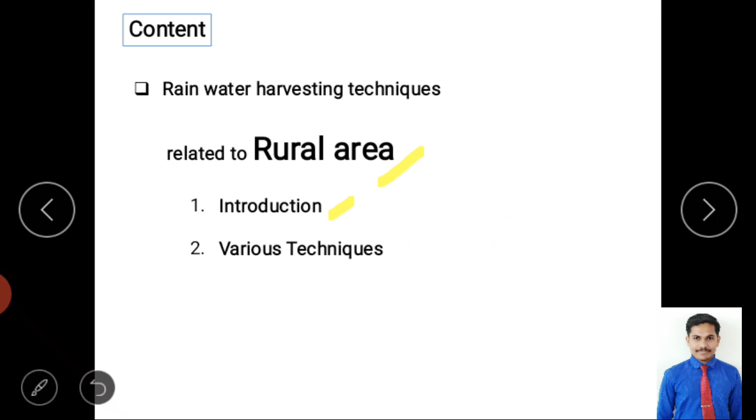First we'll understand what you mean by rainwater harvesting. As already explained in previous lectures, rainwater harvesting is mainly related to collection of rainwater, storage of rainwater, and reuse of rainwater runoff. This is our main motto.

But here we are making classification, because separate techniques are needed for urban area and separate techniques for rural area, due to certain limitations and advantages. If you see the limitations, some problems require simple and low cost techniques for rural area.

So what is the condition? Simple technique and low cost technique, that is one concern. When fulfilling the simple and low cost technique requirement, we can adapt it for rural area. Then there is a requirement of minimum specific expert knowledge, because of less skilled laborers and less known persons, it requires minimum specific expertise and knowledge.

Then it should offer many benefits, from a single work it has to benefit many works. For example, when making rainwater harvesting, it impacts drinking water, irrigation, and other conditions or environment. So it has to offer many benefits.

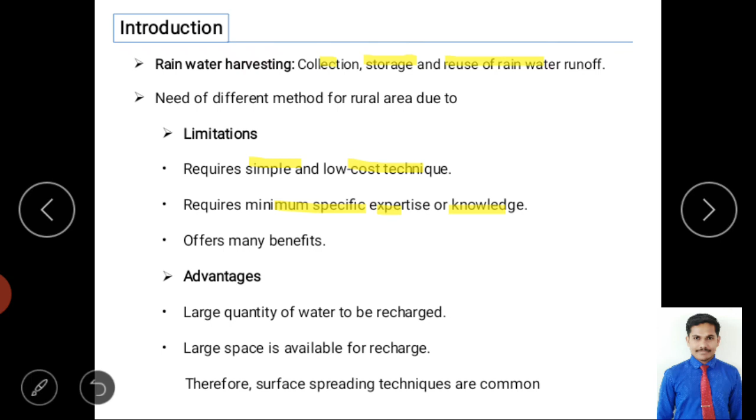Next is advantages. In rural area we get some advantages. One is large quantity of water for groundwater recharge, since huge quantity of rainfall is coming, and it is pollution less. Compared to urban area, rainwater from rural area is pollution less and less contaminated, so we can easily make groundwater recharge with good quantity.

Then large open space is available in rural area, and even the cost of the land is also less comparatively. So that's why we mainly go for surface spreading, and because of space availability, we focus mainly on surface spreading techniques.

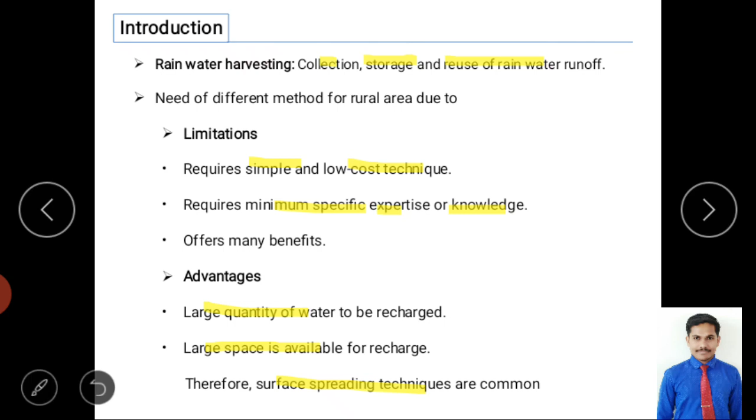There are some common techniques, known based on certain conditions. Here I have taken 11 techniques: first is the terrace method, then field trench method, cisterns method, micro catchment, rooftop harvesting, percolation tank, check dam, farm pond, groundwater dams, afforestation, then conjunctive use.

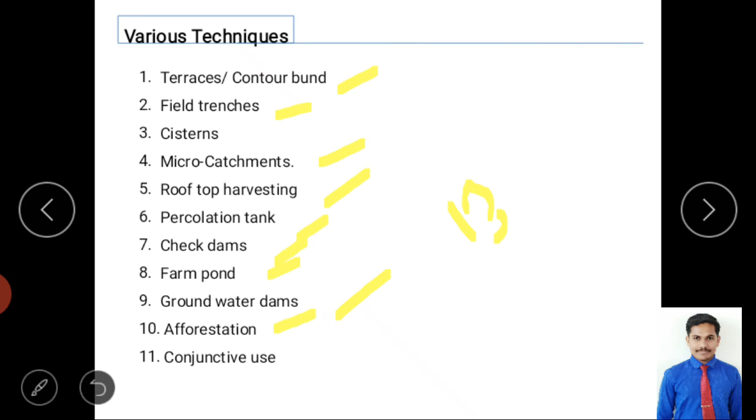Conjunctive use means it is balanced use between surface water and groundwater. So what do you mean by conjunctive use? It is balanced water use between groundwater and surface water, and from that we can overcome the shortage of water. Now we'll discuss these techniques one by one. This is the list, like you may get a question to list and explain the different techniques related to rural area. Now we'll explain one by one.

One is the terrace method, also called contour bund. I think we studied this in the generalized techniques of rainwater harvesting. Here also we use the same technique if the land is sloped land. On sloped land, quick runoff will occur, so to tackle the quick runoff we construct some bund and excavate along the contours.

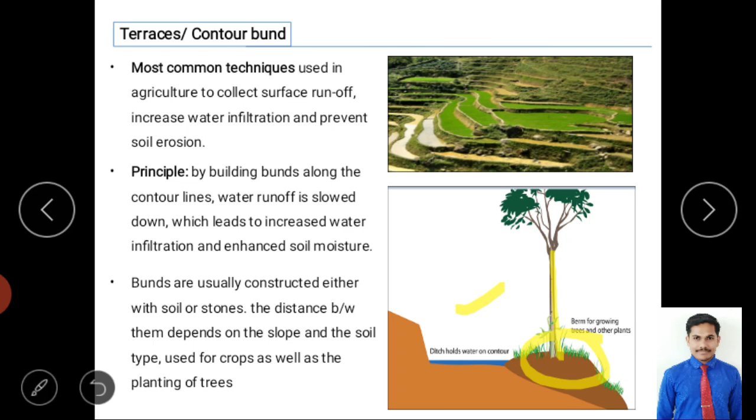So we'll see the next method now - field trenches. Basically trenches can be seen as extensive ploughing at the right angle to the field slope. For example, here we are excavating some material. If it is a land, for this land gradient, perpendicular to the surface we are excavating the material.

Due to the excavation of material, there is a ditch formation, a trench formation, and due to this trench formation along the wasteland or hilly areas, we can collect the water. Basically the trench can be seen as extensively ploughing at the right angle to the field slope, breaking the slope and therefore reducing the velocity. So here also we are mainly focusing on reducing the velocity of water runoff, reducing soil degradation and erosion, and enhancing the infiltration of surface runoff.

So what are the main focuses here? First we are reducing the velocity of the rainfall runoff. Due to reducing the velocity, it reduces silt deposition, soil degradation, and erosion. After that, it causes infiltration, and due to the infiltration we are getting soil moisture condition. So field trenches suit most soil and rainfall conditions.

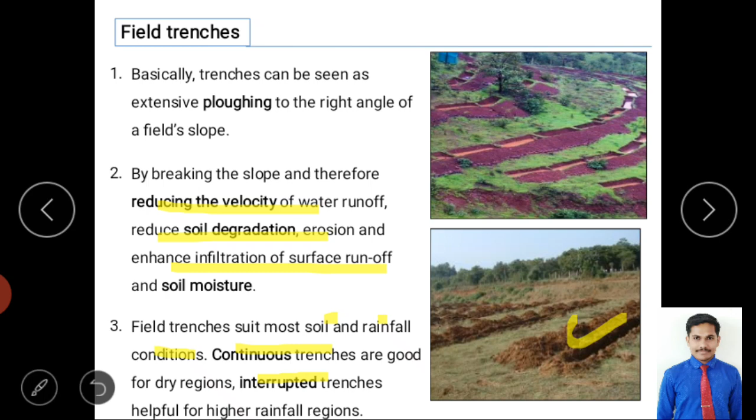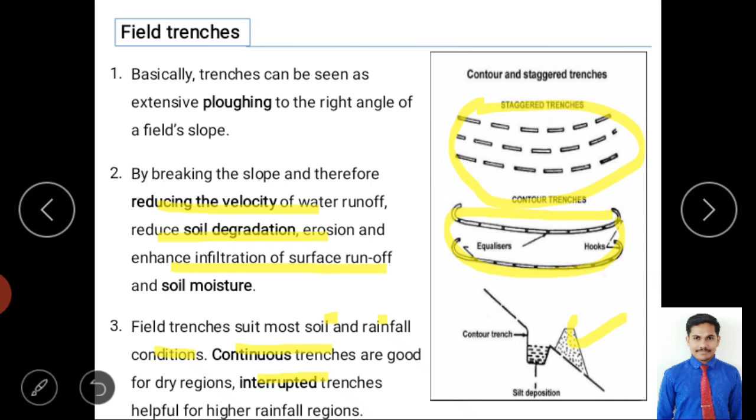If it is a dry condition, we go for continuous trench methods. If it is more rainfall, then interrupted. You can understand by this image - here you can see some disconnected trenches, where we construct these kinds of trenches where we have more rain, and continuous trenches where we have less rain. Here you can see bund is there, trench is constructed along the contour, and water is collected.

So now we'll see the next method - cisterns method. Cisterns is an underground tank that holds the water. What do you mean by cisterns? Cisterns are underground tanks, and through these tanks we are storing the water.

And what do you mean by catching and storing? It is rainwater harvesting, right? So then it has some different characteristics compared to the well. Why? Because it has waterproofing along the wall.

In modern days, the capacity of cisterns differs, from a few liters to cubic meters, and cisterns were used for both domestic and agriculture purposes. We use them for domestic purposes like cleaning clothes and gardening, and even for drinking water after filtration. With proper filtration and maintaining drinking water standards, rainwater collected this way can be used for drinking too.

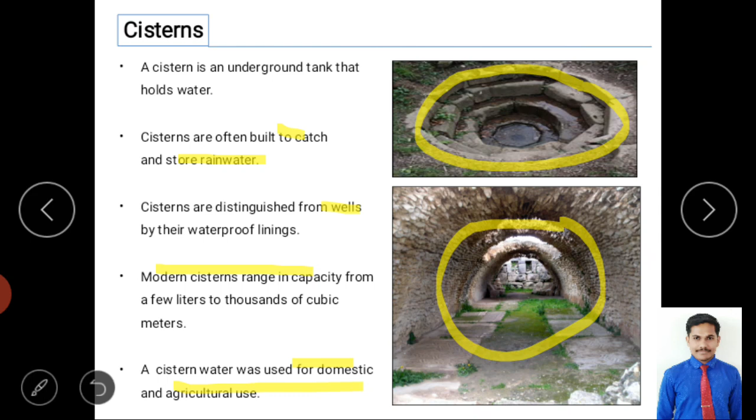Let me repeat: cisterns mean an underground tank, and the main purpose is to store water and catch rainwater. It is different from a well and not related to it. We use it for domestic as well as agriculture purposes. You can see under the ground these are storage areas with an opening, and the cross section shows it is like a simple underground tank. These are quite common in European countries.

Next is micro catchment, which we already studied in previous lectures. What do you mean by micro catchment? It is a specially prepared area with a slope and berms. A berm is like a road-like structure.

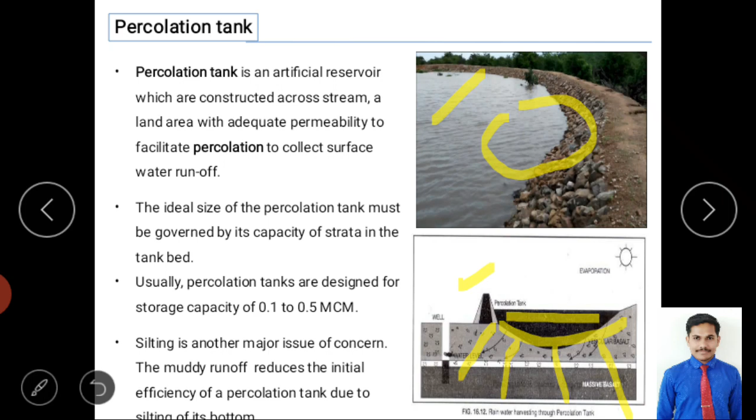Here a bund is there and water is stored, and even excavation of the ground is made, and due to this water is making groundwater recharge or percolation because of weathered zone and highly permeable material. Size of the percolation tank mainly depends not on rainfall runoff.

Rainfall runoff is very important, but capacity and size mainly depend on the strata condition, the bed condition. So usually you have a tank of capacity 0.1 to 0.5 mcm. Then one of the major problems for this percolation tank is silt deposition from the surrounding area.

If the silt is a clay material, then it definitely causes the percolation problem. So if the surrounding area has silt content of sand, then this method is good for that locality, mainly to avoid silt deposition at the bottom. Where we have less silt deposition, this method is very good, and if it is a sand material around the catchment, then it is also good.

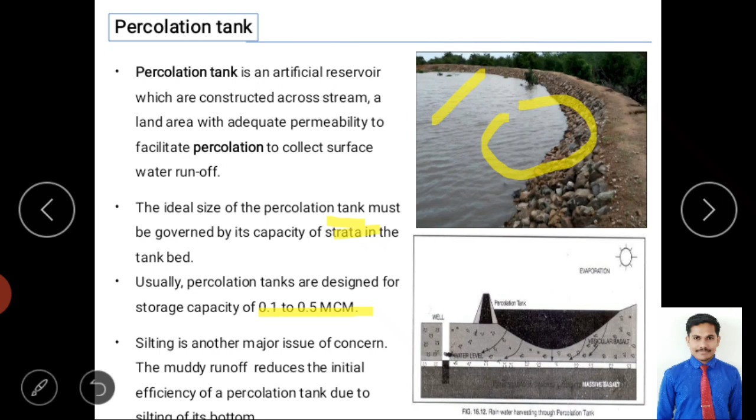So the next method we'll see now is check dams. What is a check dam? Small dams - a check dam is a small dam constructed across drainage ditches.

Drainage, for example, gully erosion - in agriculture land we can see gully erosion or removal of soil because of channel formation. So along that we are constructing a small dam, mainly across the drainage ditches or waterway, to check erosion.

Mainly we are dealing with erosion of the soil by reducing the water velocity. It is just a barrier like a dam, but a small structure, and we are preventing soil erosion by reducing the velocity. But when it reduces velocity, it definitely causes infiltration because of less velocity.

It is related to water harvesting - it allows groundwater recharge, but the level of infiltration can be slow due to silt build-up at the bed.

This method also allows farmers to protect themselves against soil loss, because topsoil is very fertile - it is rich with all the requirements of plants like NPK. So when there is good soil on top, farmers can prevent its loss by constructing these kinds of check dams.

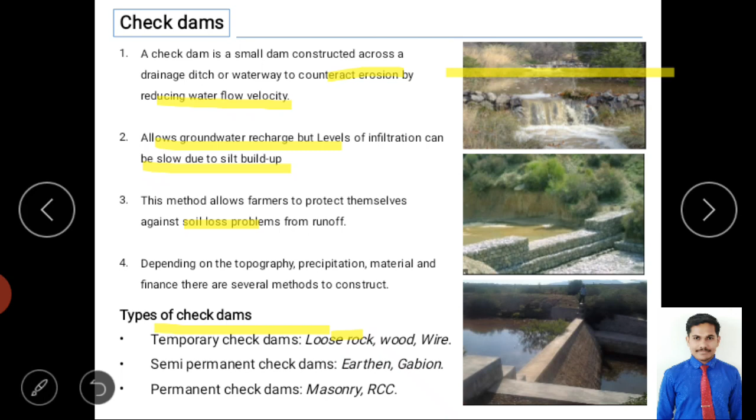Next we'll see semi-permanent check dams. We are using material in a semi-permanent nature, which means we can have an earthen dam - a small earthen dam using a small bund. But this bund is not permanent and may cause some failure. That's why it's considered semi-permanent.

Another type is the gabion structure - it is like a dam, but here only stones and wire mesh are used. A wire mesh box is filled with stones, and that is constructed across the nala, similar to masonry work but without mortar and without cement.

What is the binding material giving it strength? Wire mesh, galvanized wire mesh on the surface of the stone. You can see in the image this stone masonry entirely covered by wire mesh, starting from the foundation - that structure is called a gabion structure.

Next we have permanent check dams. Why is it called permanent? Because it is constructed with masonry - maybe stone masonry, brick masonry, or even RCC, as you can see in the third image.